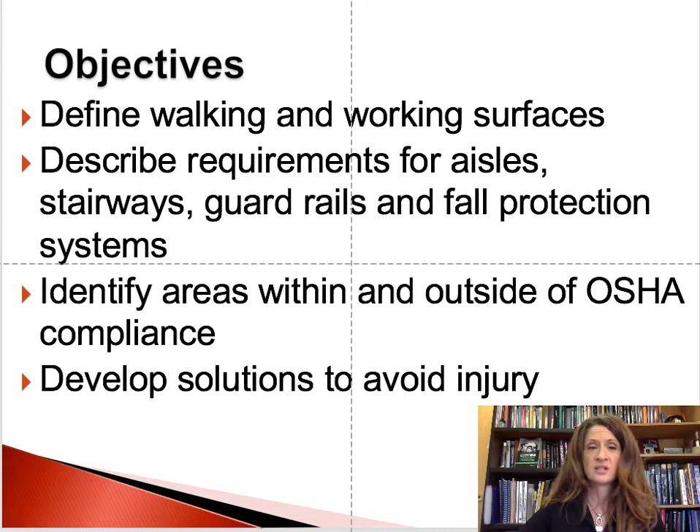Before we begin the learning unit, I'd like to introduce myself to you. My name is Theresa Stack, and I have a Bachelor of Science degree from the University of Connecticut in Natural Resource Management and Engineering, as well as a Master of Science degree from the University of Washington in Occupational and Environmental Health. I'm currently pursuing a doctoral degree from the University of Montana. I am a certified professional ergonomist and a certified safety professional. I recently published a text, Occupational Ergonomics, a Practical Approach, through Wiley.

My professional experience: currently I am an associate professor at Montana Tech of the University of Montana in the Safety, Health, and Industrial Hygiene program. Before that, from 1999 to 2013, I was the senior occupational ergonomist in support of the Department of the Navy. I have also worked for the Idaho National Engineering and Environmental Laboratory in Idaho Falls, Idaho, and was a field technician responsible for cleaning up chemical and oil spills in the environment in Connecticut.

We will cover the different parts of the standard. There are 10 parts of this standard, which include general requirements for all walking and working surfaces, considered a horizontal part of the standard, as well as the vertical part of the standard, which covers specific walking and working surfaces: ladders, step bolts and manhole steps, stairways, dock boards, scaffolding, and rope descent systems.

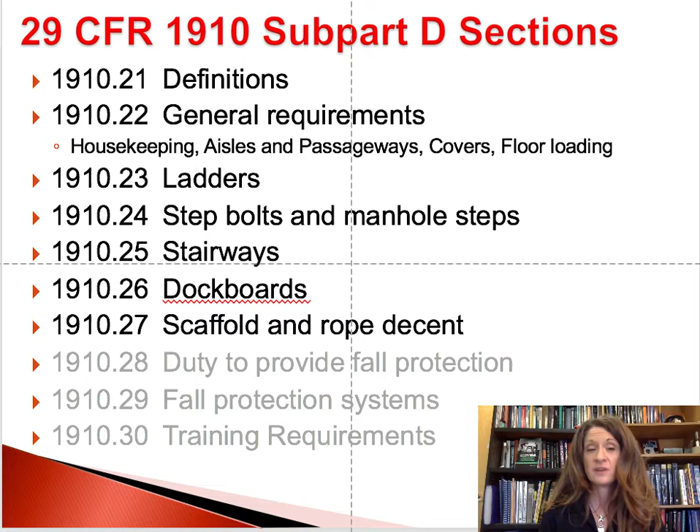In a lesser degree, we'll talk about the requirements for your duty to provide fall protection equipment, fall protection systems, and training requirements for fall protection systems. This is not covered in great detail within this area, and therefore you should seek more information in the standard or a different learning unit, if this is a requirement for you.

So what's the data as related to walking and working surfaces? Why do you believe this will be a concern within your workplace? Well, there were 800 fatalities related to walking and working surfaces in 2015. 16% of them were from slips, trips, and falls, and of those 800, 81% of them were falls to lower levels.

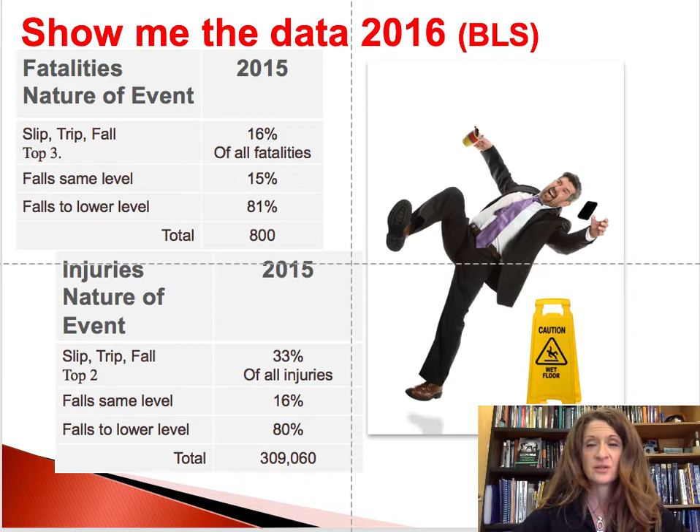As far as injuries go, 33% of all injuries experienced by people in the workplace were related to slips, trips, and falls. It is the number 2 way in which people get hurt in the workplace. And again, 80% of those injuries were related to falls to lower levels.

So why do people fall? Well, people fall for many reasons, but the scientific background behind why people fall is when their center of gravity moves outside of their stance envelope. So when your CG is either too far forward or too far back, you fall.

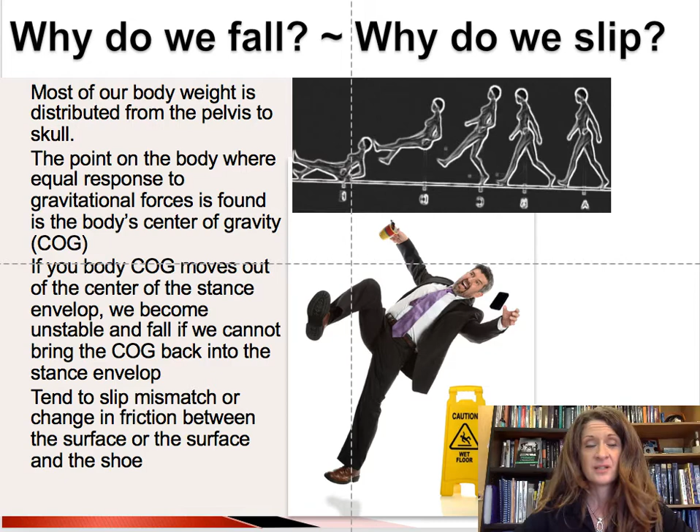You slip typically because of a mismatch between your shoe and the flooring surface, or when you switch from a high to a low coefficient of friction. So going from a rug to a wet floor would be a reason why people would slip, or the reason why people trip is going from a low coefficient of friction, like a wet floor, onto a high coefficient of friction, like a carpeted area. Also, wet surfaces tend to be slippery, and people trip over things that protrude out into the walkway. So we fall because our center of gravity is not within our stance. We slip and trip because of changes in the coefficient of friction.

So the scope of 1910 subpart D covers general industry. This is all places in which people walk or work. If you're part of a construction site, that would be 1926, so the requirements are not here, as well as maritime is covered under a different occupational safety and health standard. So all other areas, factories, office buildings, hospital environments, schools, they're covered under general industry.

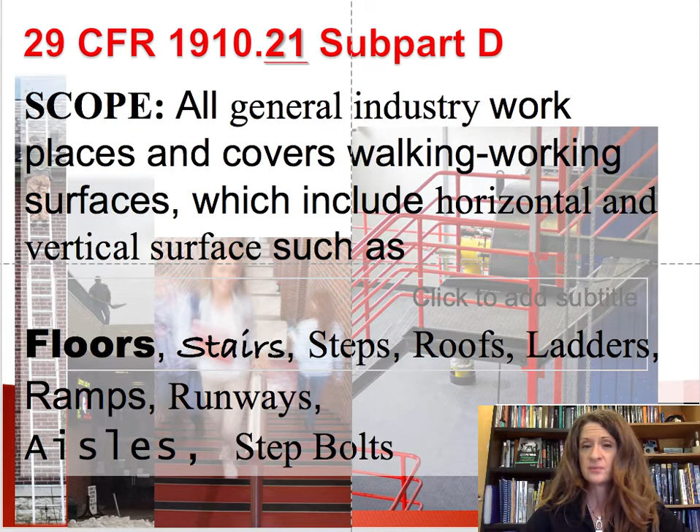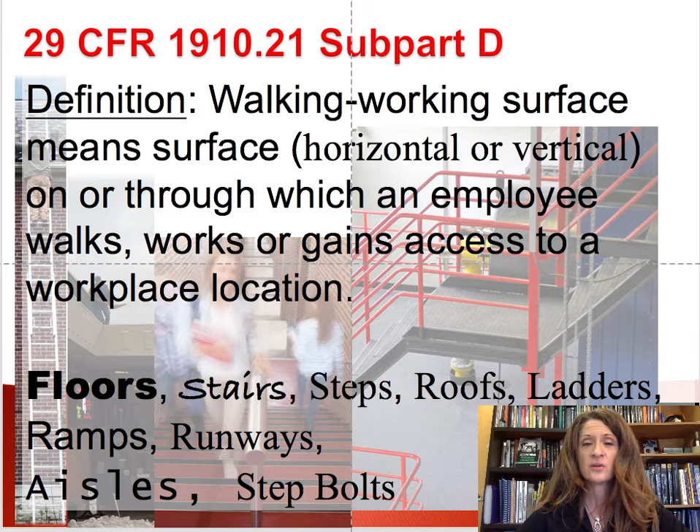And this particular subpart D covers workplaces where walking and working surfaces are both horizontal and vertical, such as stairways, steps, roofs, ladders, ramps, runways, aisleways, or step bolts. Walking and working surface means a horizontal or a vertical surface on or through which an employee walks, works, or gains access to a working location.

Another definition that is important is an unprotected side or edge. That's a walking and working surface where there is no wall, guardrail, stair rail, or other type of system in place to protect an employee from falling to a lower level. This picture is an example where there is no guardrail or balcony in place to protect an employee from falling to a lower level. That's the definition of an unprotected edge.

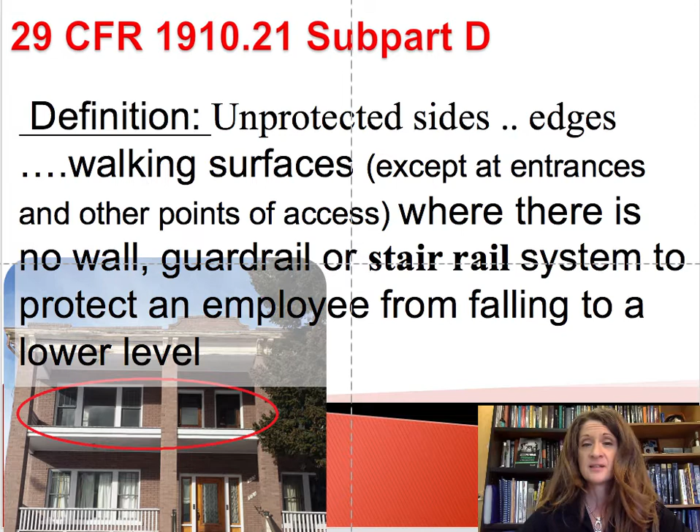Now that we've finished our definitions, let's get into the specific general requirements which cover all places of employment in which walking and working surfaces are found. All places of employment, passageways, storerooms, should be kept clean, orderly, and in a sanitary condition.

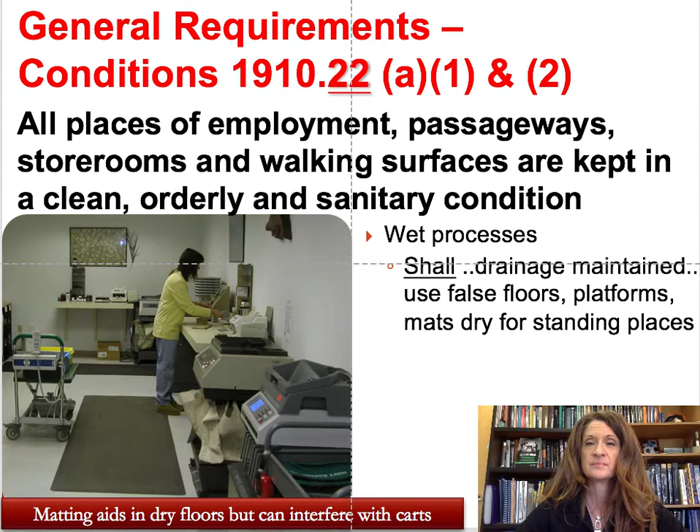A new rule under subpart D, that's 1910.22, states that walking and working surfaces are maintained free of hazards such as sharp protrusions, objects, loose floorboards, nails, splinters, and loose tiles, so that people don't trip.

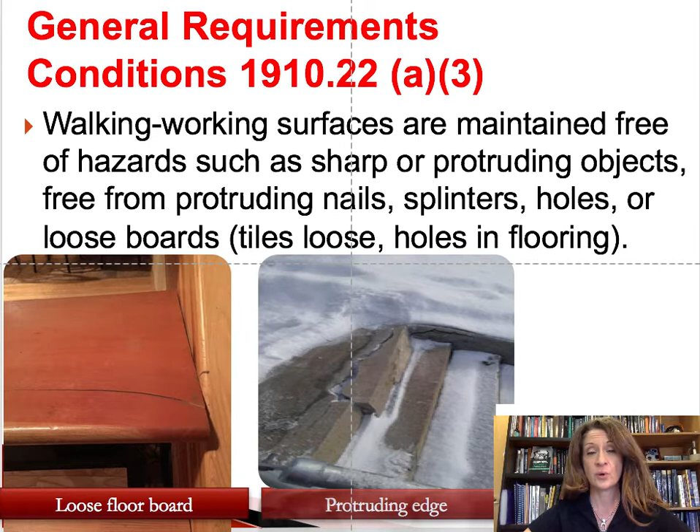So are these proper walking and working conditions? Well, at our loading dock here, you can see that people cannot actually climb up the stairs to the loading dock. Folks were actually jumping off of the loading dock. The stairs aren't clean and they're also blocked.

In this picture, we have a box in the way that prevents you from being able to exit. This would not only be a violation of subpart D, walking and working surfaces, but also a violation of subpart E, means of egress.

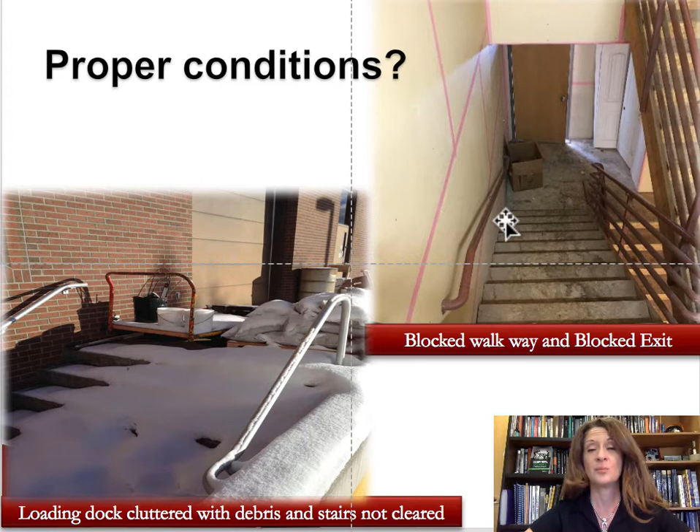General requirements also require employers to inspect walking and working surfaces regularly and correct, repair, or guard against hazardous conditions. This is another addition to subpart D that may be new to you if you're following the old standard. You can see in our picture here where the ladder extends into the walkway.

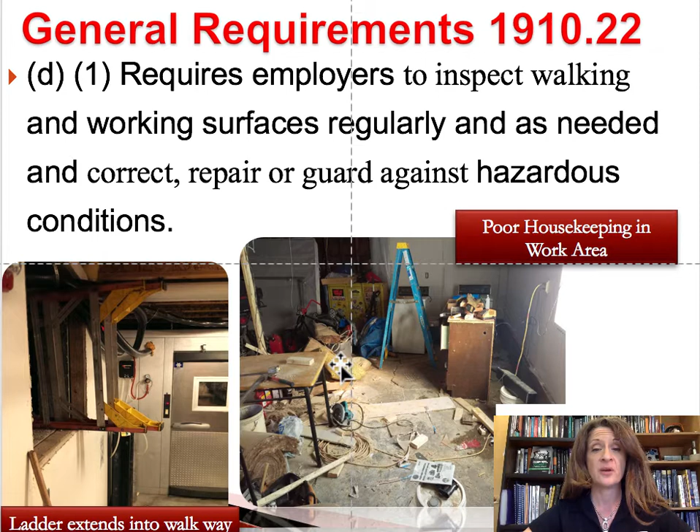People may walk into it when they're going to the cooler. And in our construction zone, although this would be repair within a facility and so would not fall under the construction standard but under general industry, we have a housekeeping issue here, and certainly our tripping hazards are not acceptable.

So we've covered the general requirements for walking and working surfaces, and now we'll get into general requirements for ladders.

Ladder rungs need to be not less than 10 inches and not more than 14 inches apart; that is the step distance. Step ladders, such as pictured here, should be no higher than 20 feet, and a step ladder like this needs to have a locking device in place when it's in the expanded position. The minimum width for the ladder is 11.5 inches, while the minimum width for a step stool is 10.5 inches.

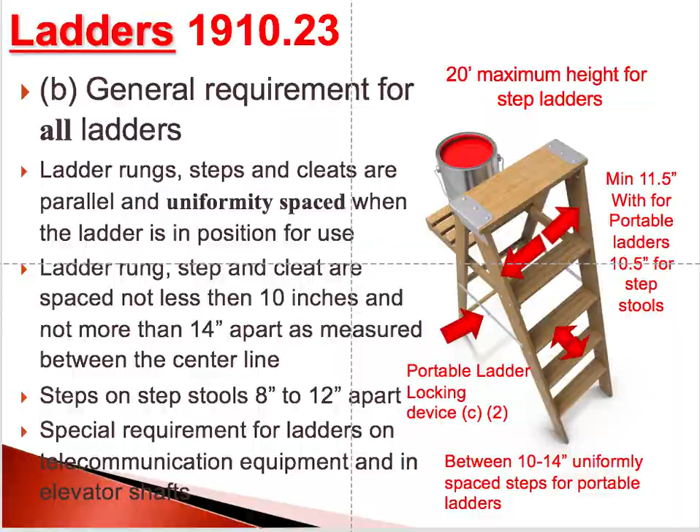Ladders are not to be loaded beyond their maximum intended load, and this includes the weight of the person getting on the ladder as well as the tools and equipment carried upon it. That is the maximum load, and the ladder should not be loaded over it. For example, if the ladder's rated weight was 250 pounds and you had a 250-pound worker, you were probably overloading it, because that worker could also be carrying a piece of equipment going up the ladder, or wearing heavy clothing in inclement weather.

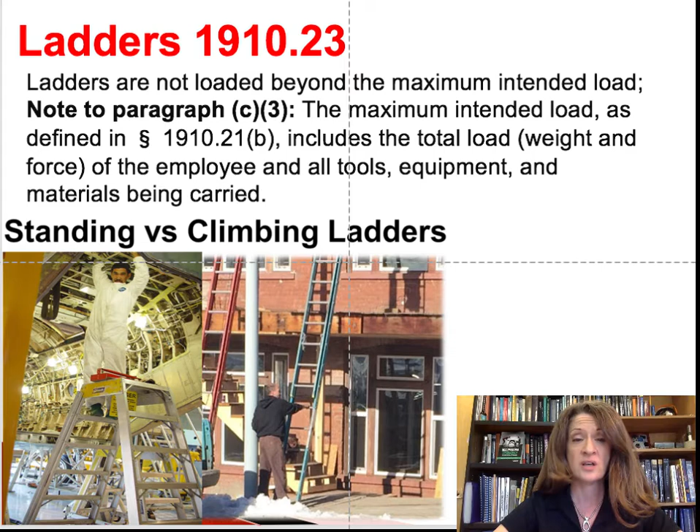There are two different types of ladders: standing ladders and climbing ladders. Standing ladders tend to have flat rungs so that your foot can rest on them comfortably without becoming fatigued when standing for long periods. A climbing ladder, on the other hand, has round rungs so it's comfortable for your hands to grasp while climbing.

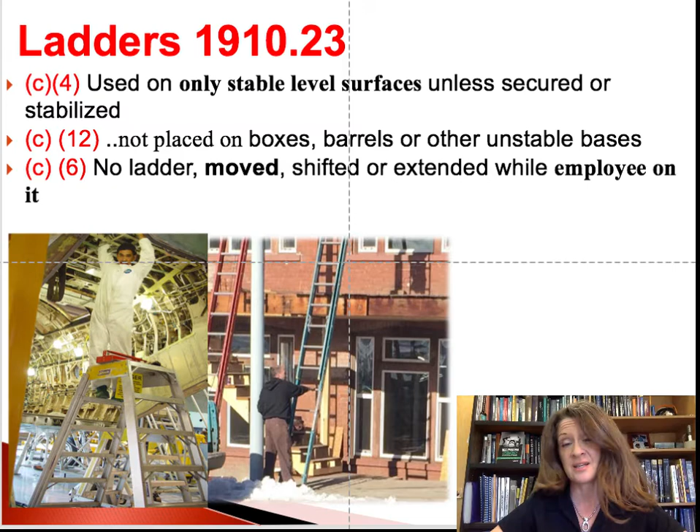Ladders should only be used on stable surfaces unless they're secured or have special stabilizing legs on the bottom. They should not be placed on boxes, barrels, cement blocks, cinder blocks, or other unstable bases. No ladder should be moved, shifted, or extended up or down while people are on it. Ladders are only to be used for the purpose for which they were designed.

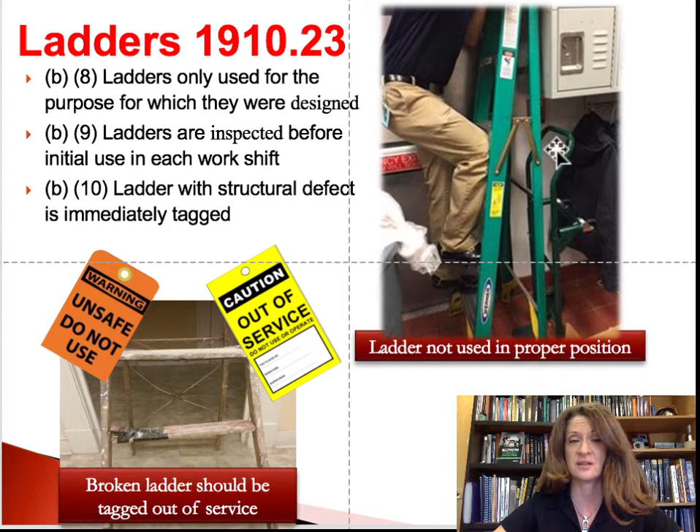This is an example of improper use of a ladder because the spreader bar, which keeps it in place, is not completely engaged. Ladders need to be inspected before every use to ensure structural integrity, and if there is a broken part, you should tag it and take it out of service immediately until it's repaired, if it can be repaired at all.

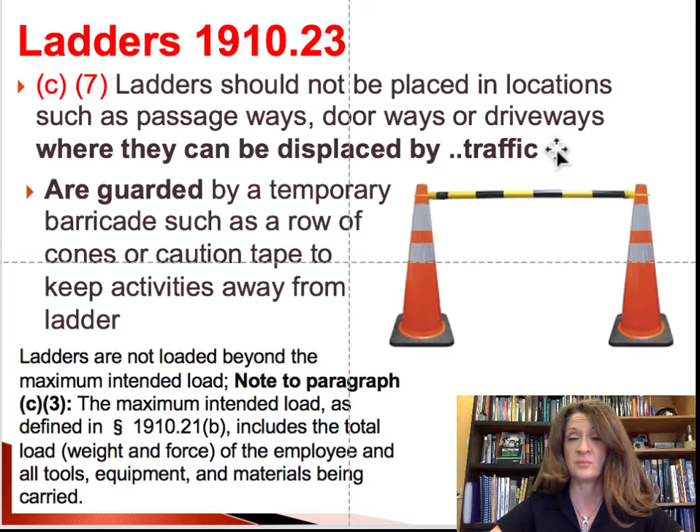Ladders should not be placed in locations such as passageways or doorways where they can be displaced or knocked over by traffic, whether that's a fork truck or vehicle traffic, or someone opening a door. If you need to place a ladder there for repair purposes, such as fixing something in front of a door, you should guard the area with some type of temporary barrier, like you see here, as a reminder for people not to walk into that area.

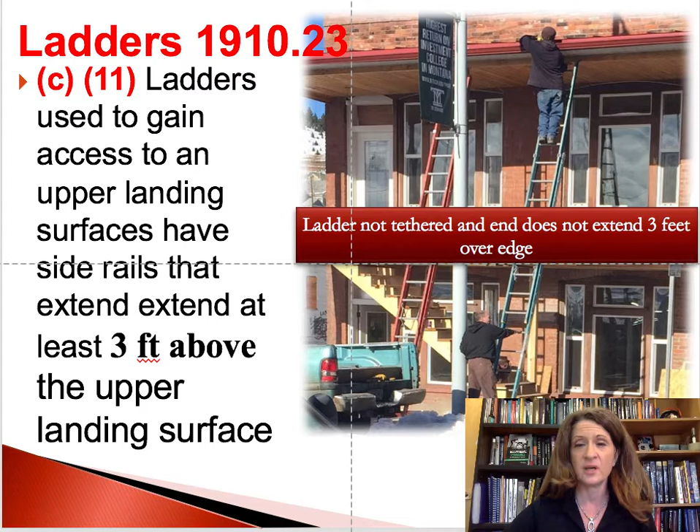Ladders, such as this extension ladder, that are used to gain access to an upper surface, such as a roof edge, need to have the side rails extending at least 3 feet above the upper surface. This is an example of where the ladder is not extending above the upper surface, and it can absolutely slip out from underneath the individual who is on it, even though somebody's trying to support it from the surface below. This is a really dangerous situation to be in.

Is this proper use of ladders? No.

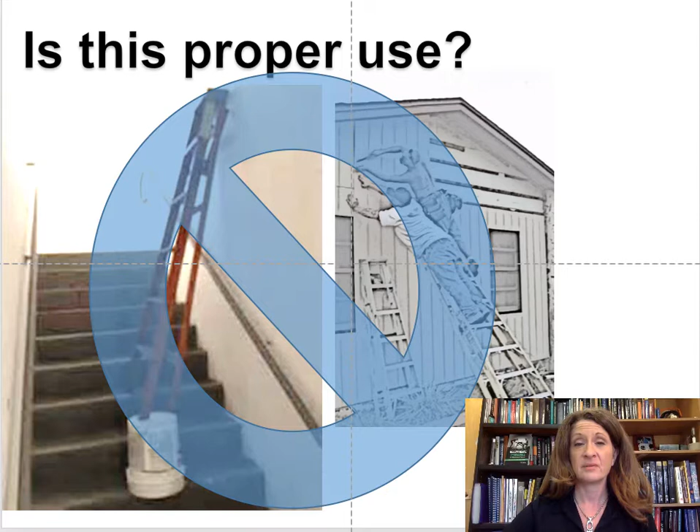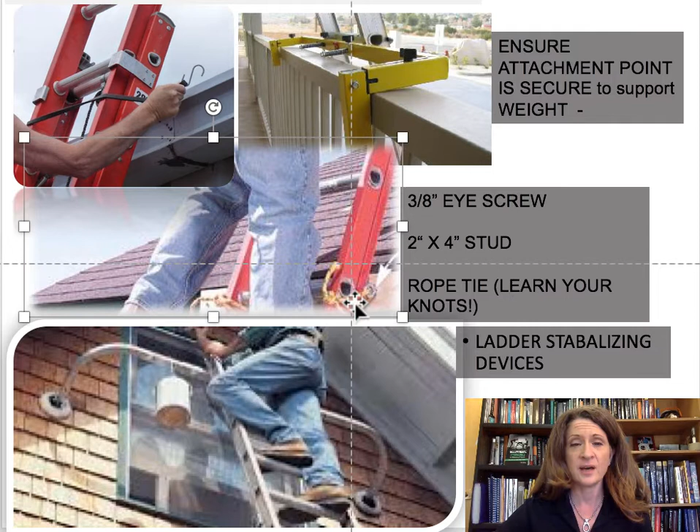Here is an example of where a worker had put a 2x4 down in place and put a 3/8 eye screw into the 2x4 and then tied a rope to the eye bolt in the ladder. So this would be an example of where the ladder was secured well to the roof edge, and you can see it is extending above the roof edge surface.

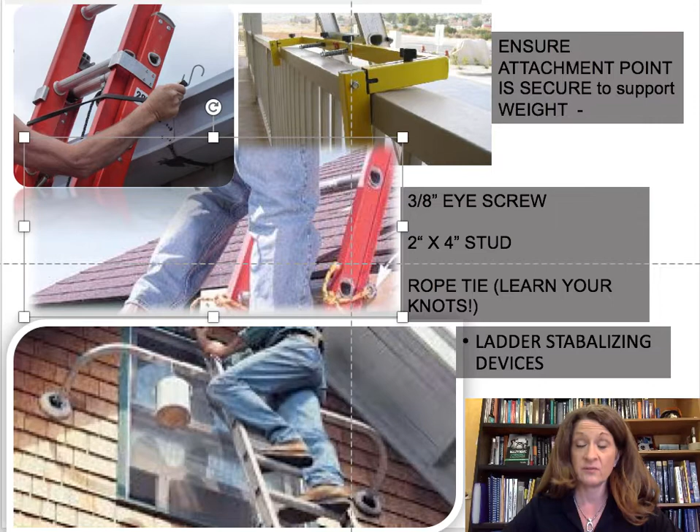And this is an example of a spreader bar or a stabilizing device that can be used when you're working high up in the air, and it helps the ladder from moving side to side, and it also enables this person to get close to the windows in which they're working. So there are lots of different kinds of devices that can be used to stabilize a ladder once people get above 4 feet in the air.

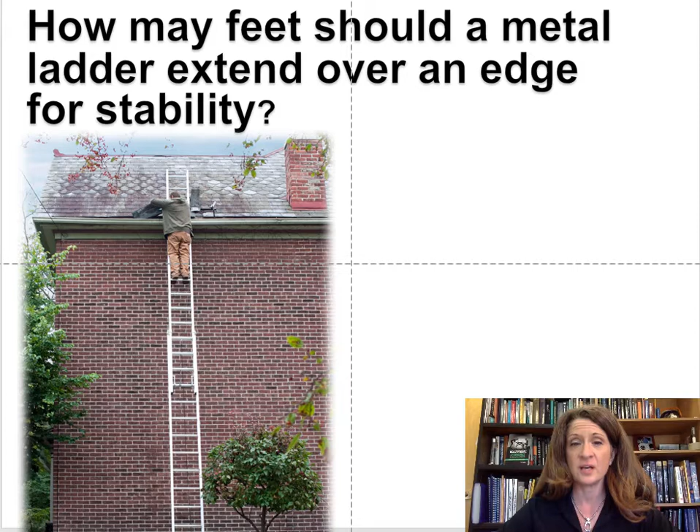So as a review question, how many feet should a metal ladder extend over an edge for stability? And the answer is 3 feet.

We've moved from portable ladders to fixed ladders. Fixed ladders need to be able to support the maximum weight in which it is intended to support. So again, that's the weight of the person plus the tools and equipment for which they would be using when they were climbing the ladder.

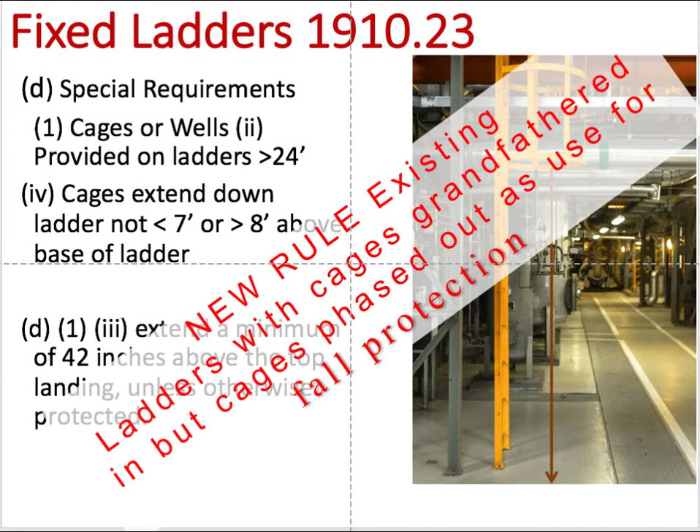And that's because a cage such as this does very little to stop someone from falling. They do fall into the cage, but they're likely to fall through the cage or be very severely injured when they are falling.

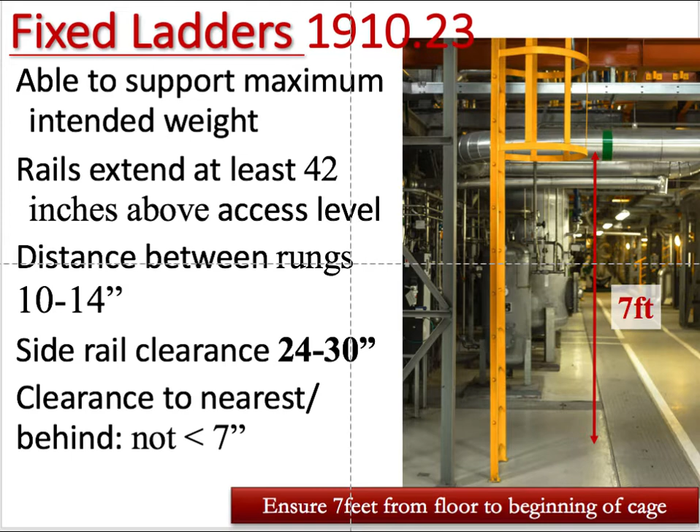The new requirement as of November 2018 is that all fixed ladders installed after November 2018 that are greater than 24 feet in height need to have a ladder safety system in place, and this ladder safety system will be required on all ladders, even ladders that were installed in 1988, by 2036. So you have to retrofit your existing ladders, or for all new ladders above 24 feet -- that's the top of the ladder to the ground -- must have a ladder safety system in place.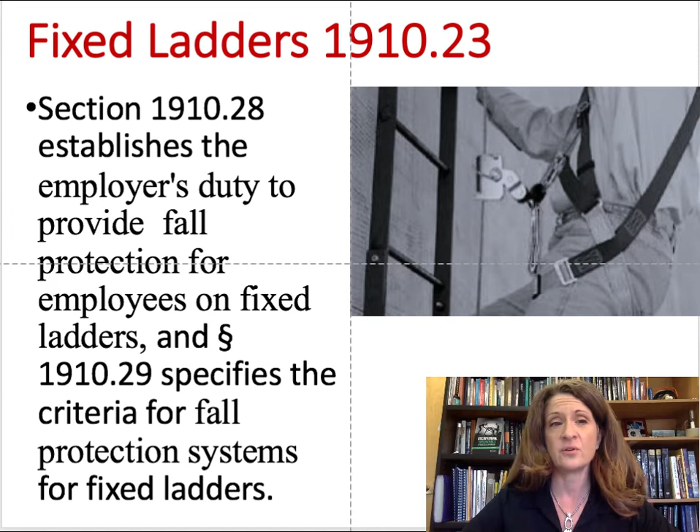You can leave them in place, but you'll have to provide a ladder safety system after 2036 or for all new installations after November of 2018.

So we've gone from portable ladders to fixed ladders, and now step bolts, which are pictured here, or manhole steps. Manhole steps are uniformly spaced between 12 and 18 inches apart. That's this distance here. They need to be 4.5 inches or greater in width, and the clearance behind is a 7-inch clearance. So if they were installed before January of 2017, the standard states that they're capable of supporting the maximum intended load, which is again the worker and any equipment they would be carrying.

Anything installed after January of 2017 needs to support 4 times the maximum intended load, as well as any new installations after January of 2017 need to be coated or constructed so that if they're in a corrosive environment, such as concrete that can break down over a period of time, the material needs to be coated to prevent corrosion.

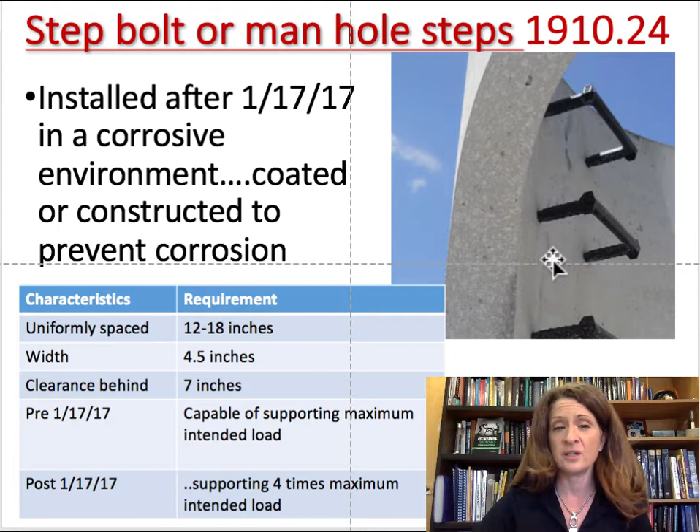So we've moved from ladders to stairways. 1910.25, you need to have at least 6 feet 8 inches between the leading edge of the tread and an overhead clearance. That's so people don't bump their head when they're walking up the stairs. They shouldn't have to duck. As in this picture, there is not at least 80 inches of clearance.

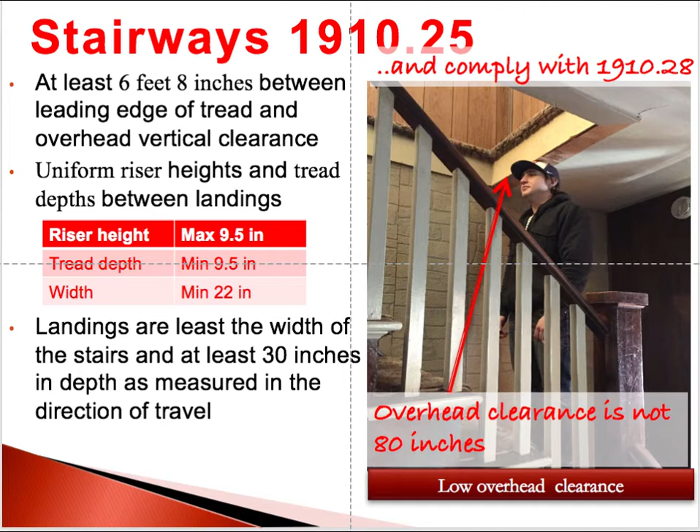The riser height, so that's how high you lift your foot when you walk from one step to the next. The maximum height is 9.5 inches. The minimum depth, so that's how deep the stair is, is 9.5 inches, and the minimum width is 22 inches. And you need to have at least 30 inches of depth on every landing, so you have enough for people to step up and stop and possibly turn a corner.

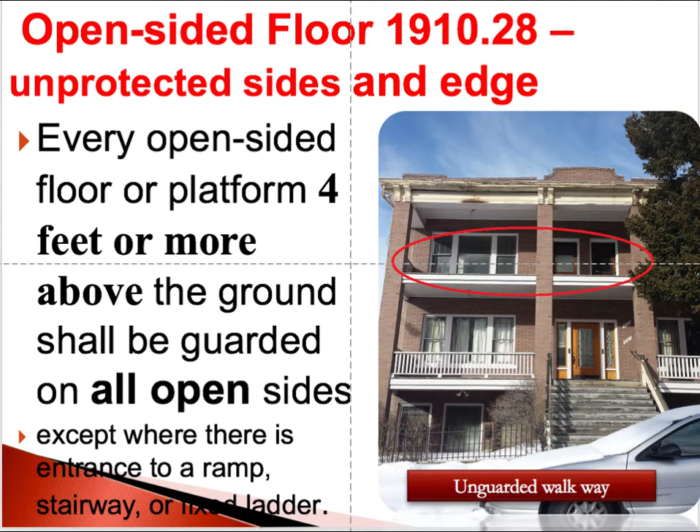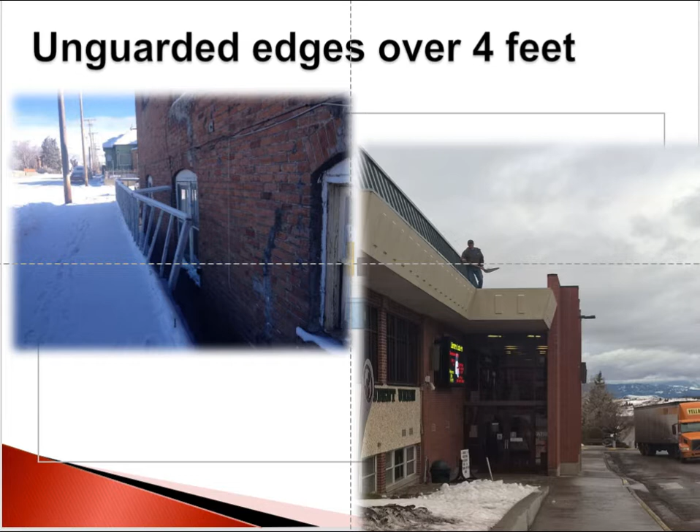And so although the next slide covers open-sided edges, I want you to understand that a stairway can also be an open-sided edge if it doesn't have a stair rail or a handrail, and needs to be guarded anytime it is more than 4 feet above the ground. So are these examples of unguarded edges that are more than 4 feet above the ground? Certainly, this roof is an example of an unguarded edge, as well as the distance in which you'd fall because the guardrail is not secured appropriately in place.

Surfaces over 4 feet high, whether it's a platform or a stairway, need to be guarded, or anytime you have 3 stairs or 3 treads, that also needs to be guarded. So it's either 4 feet, you need to guard it with a hand or guardrail, or if you have 3 steps or more, it needs to be guarded.

And so the requirements for this are the top rail is 42 inches above the surface, and that's plus or minus 3 inches, so it's 39 to 45 inches. Your mid-rail is at 21 inches, ensuring that there's no more than 19 inches of opening between either the ground and the mid-rail or the mid-rail and the top rail, and for a static load, which means somebody leaning into the top rail, that top rail needs to be able to withstand at least 200 pounds of force.

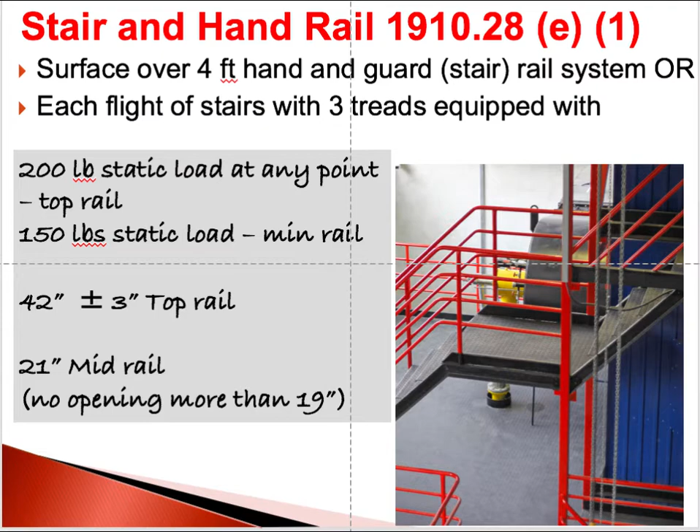To explain a little bit about the guardrail, handrail standard, a stair rail is on the open side of a stair, where a handrail is on the closed side of a stair. And the standard says that this rail needs to be 42 inches high, again, plus or minus 3 inches. And that's because 99% of the population is shorter than 6 foot, 6 inches tall, and therefore their center of gravity will be below this top rail, and they're not likely to accidentally topple over the rail. So that's where the specific anthropometric measurements come into place when dealing with stair rails and handrails.

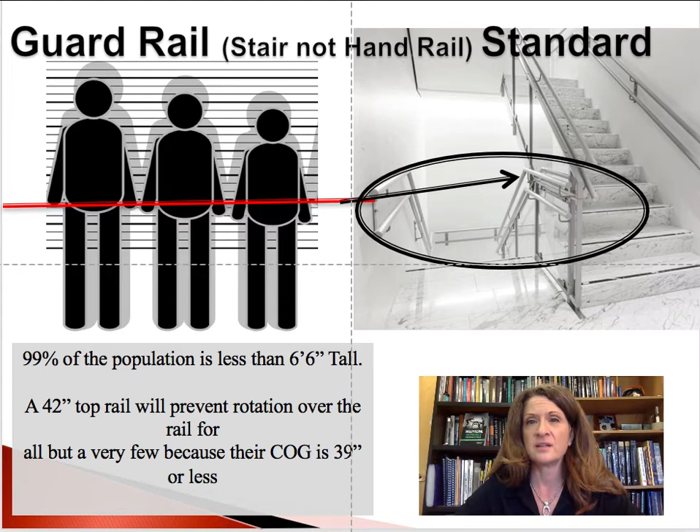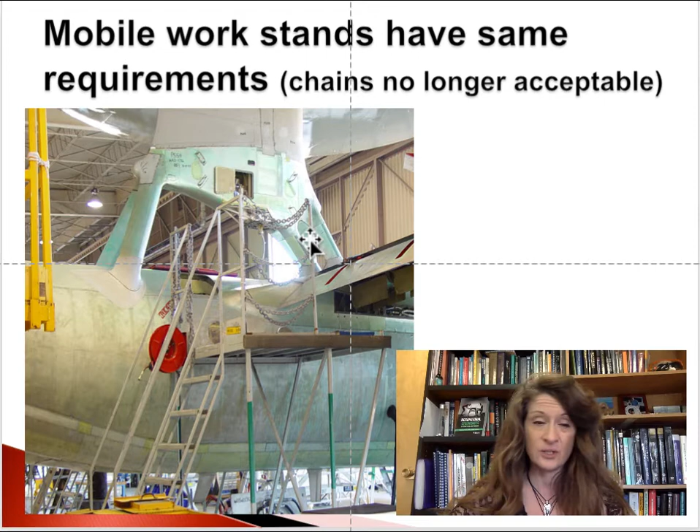I wanted to give a definition of what a hole means: a gap or open space in the floor or horizontal work surface that is at least 2 inches in diameter. This is an example of a hole—it's bigger than 2 inches in diameter, a situation where somebody can fall through to a lower level.

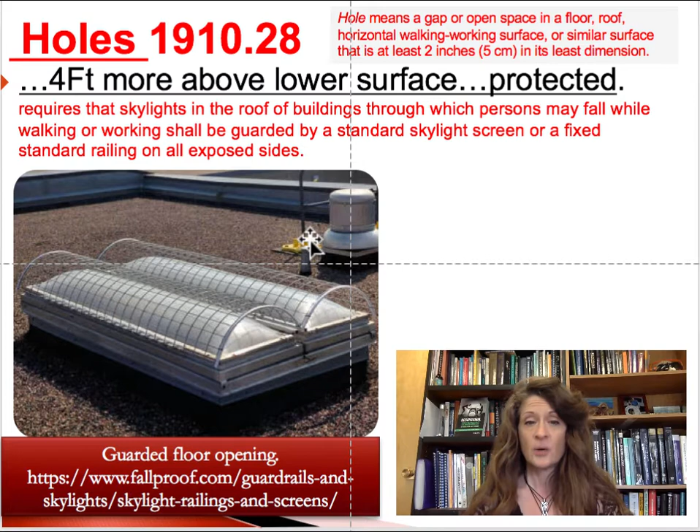Skylights need to be protected, either temporarily with barriers while people are up there, or permanently, as you see here, with a cage system on top of the skylight.

Moving forward from stairways to dock boards. Dock boards are used to bridge the gap between the loading dock and the truck. They can be dangerous because they're heavy, and if they're not put in place appropriately, the person or the industrial truck going onto the dock board can fall off, or the dock board itself can fall off.

They need to be anchored in place somehow to prevent movement, which is why this one has a safety pin on it. Vehicles on dock boards should secure their wheels with wheel chocks so they don't move and kick the dock board out of place. Dock boards should also be equipped with handles to permit safe handling so you don't get your fingers caught underneath them.

The new standard that came into play in 2017 requires that dock boards have an edge on them to prevent a vehicle from rolling off.

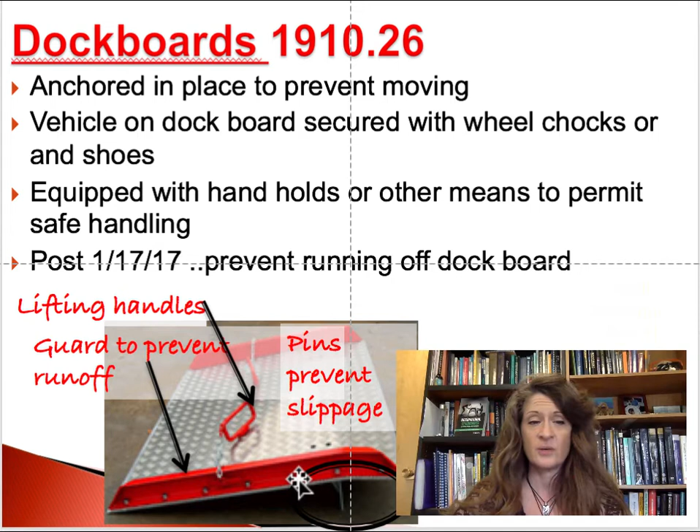Scaffolding used to be in the old part of 29 CFR 1910 subpart D, but it has now been removed. If you need to reference scaffolding, you need to go to 29 CFR 1926, which is the construction standard. So all of scaffolding has been moved from walking and working surfaces to the construction standard.

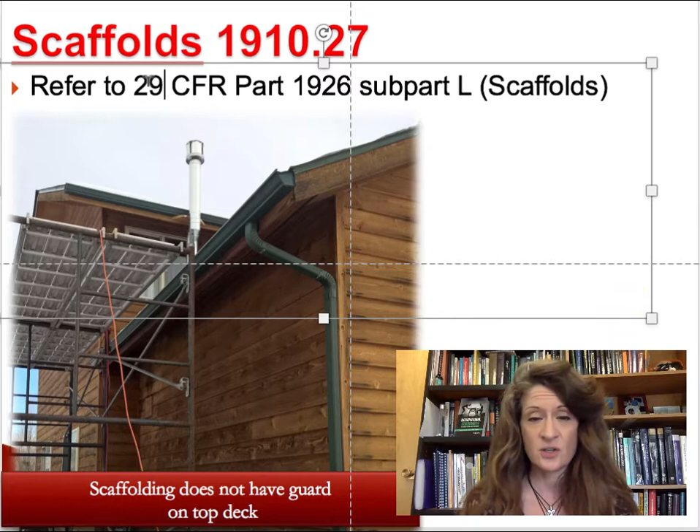This is an example of scaffolding which doesn't have the top rail on it—an example of scaffolding not being used appropriately, or more accurately, not set up appropriately.

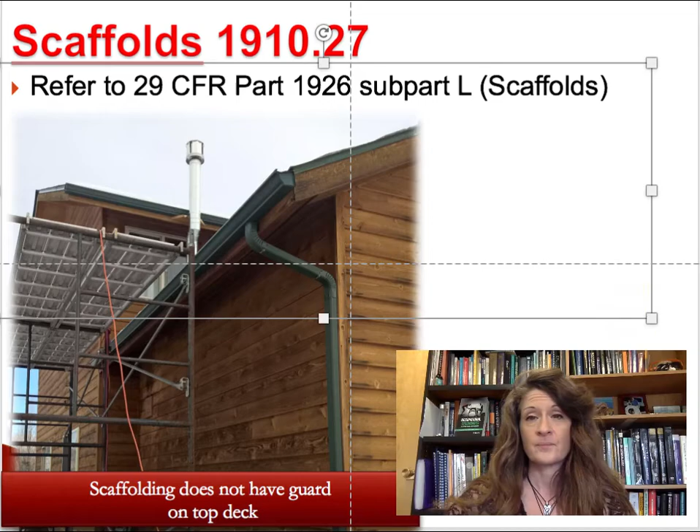Rope descent systems are used when people are working on surfaces where you can't use a ladder or scaffolding. For example, if you have a tall building, 4 or 5 stories, and people need to wash windows, as you see in this picture, that's considered a rope descent system.

Before use, the building owner must, in writing, test, certify, and maintain each anchorage point so that it is capable of supporting at least 5,000 pounds. This is a change to the standard—you now need an annual inspection and a 10-year certification by a secondary entity to ensure that the anchorage point hasn't worn out over time.

People can only use rope descent systems under the direction of a qualified person, and training for people using rope descent systems is part of 1910.30. It's subpart D, part of this standard, but it's later on in the standard that discusses the required training.

Also, for rope descent systems, you have to have some kind of anchorage point, usually anchored to the person or to what they're descending on. Rope descent systems shouldn't be used in hazardous conditions such as high wind. And if you have a sharp edge over which the rope would pass from your building, you need to pad the edge so the rope doesn't rub, and make sure there are no hazardous chemicals, open flame, or other conditions that could be destructive to the rope itself.

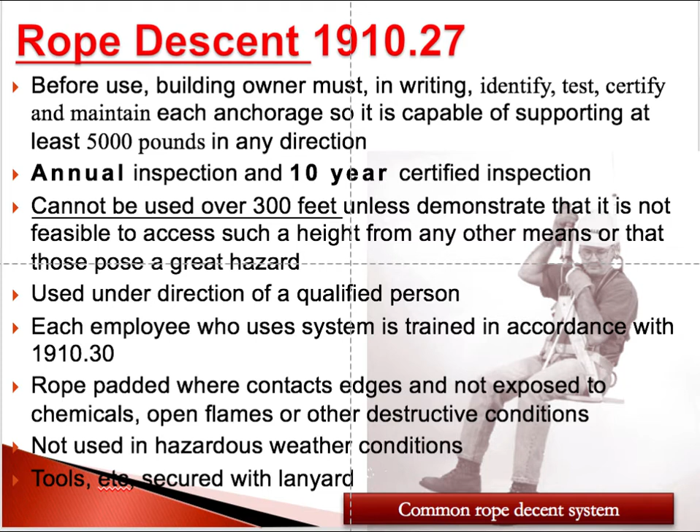For our knowledge check: can you list 3 requirements to consider with the use of either a dock board or a rope descent system?

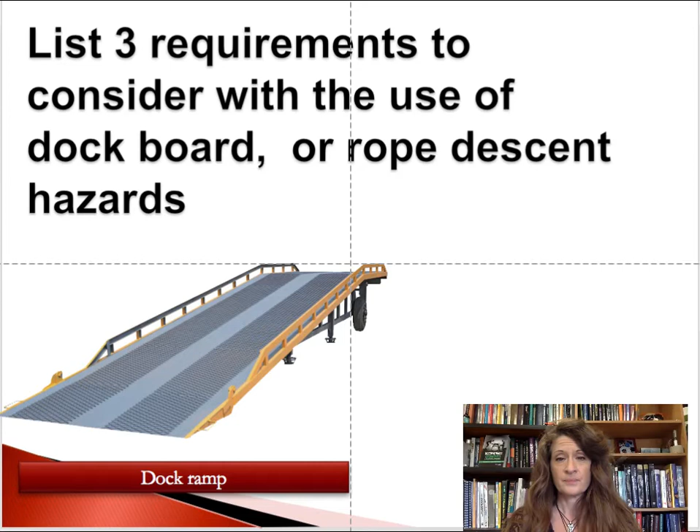Some possible answers for dock boards: they should have a guarded edge, carrying handles, pins to secure them in place, and vehicles need to chock their wheels when on a dock board. For a rope descent system, they can't be used for distances greater than 300 feet, require annual inspection, need a 5,000-pound anchorage point, and must be certified every 10 years.

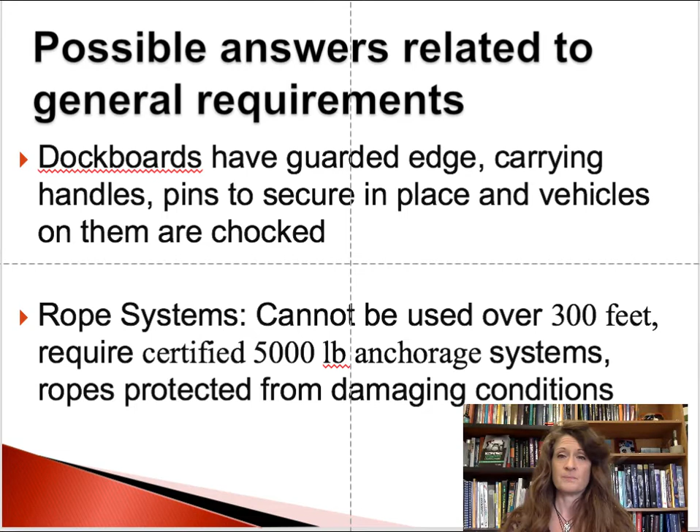1910.28 isn't covered in great detail here, but I wanted to give you a brief overview because you do have a duty as an employer to have fall protection and falling object protection in place for people. Employers need to protect workers from falls by choosing from a wide range of fall protection systems, including personal fall protection systems, and eliminating the mandate to use guardrails as the primary method. This standard gives you flexibility to determine which work method will work best for you.

In areas that are temporary or infrequent, you can use designated areas as a means of protecting people from falls. You can also use guardrails, safety nets, or other fall protection equipment that best meets the need. If you have a roof that people need to access for repair services, make sure your roof has protections in place, and reference this part of the standard.

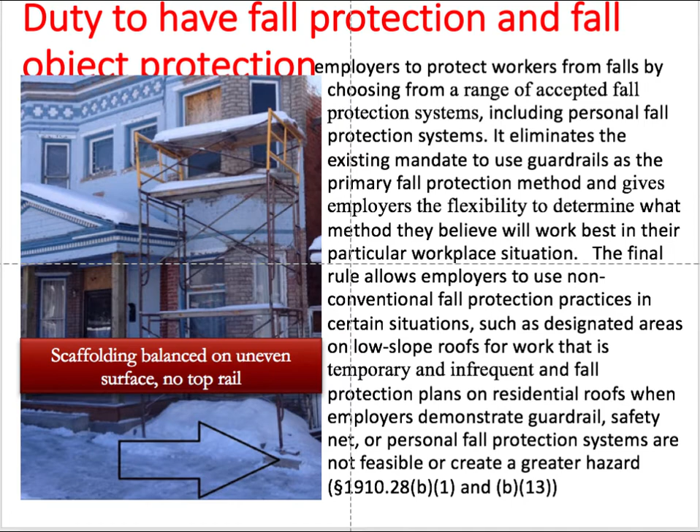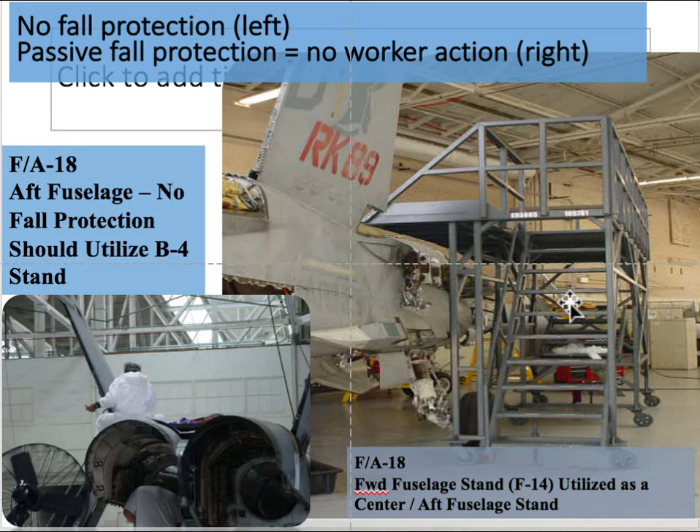Some other examples of what we call passive fall protection. Passive fall protection can be the best option in some instances because it requires no worker action or additional worker training. You don't have to have personal protective equipment—you're eliminating the chance for somebody to fall.

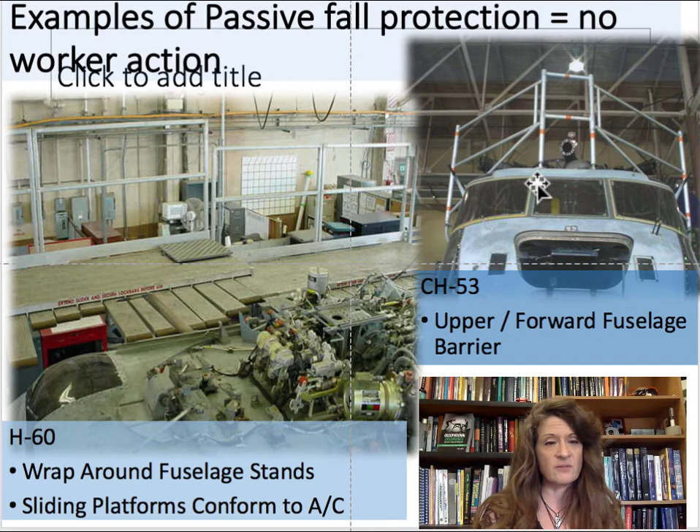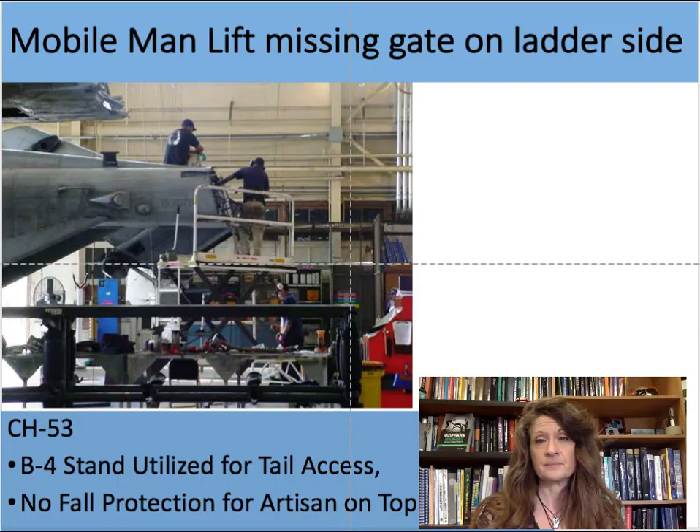Some strategies to avoid injuries: clean up spills immediately or report them, put a cone out so people don't lose traction, use wet floor signs and keep them dry if possible. Another example, when cleaning floors, is to clean one side at a time so people always have a dry surface to walk upon.

You can use non-slip coatings on floors in kitchens and bathing areas if you happen to be in a nursing home. That doesn't actually prevent people from falling, but non-slip coating provides additional traction or friction.

The right shoes for the job—sturdy shoes—can be a policy in your workplace, as well as encouraging people to use handrails on stairs. Never use corridors or aisleways for secondary storage so there's nothing for people to trip over. Keep electrical cords out of the walkway and off to the side if you need to use them. Quickly repair or maintain damaged floor, carpeting, or material. Clean snow out of the way and use well-lit areas—these are all good strategies to prevent injuries in the workplace.

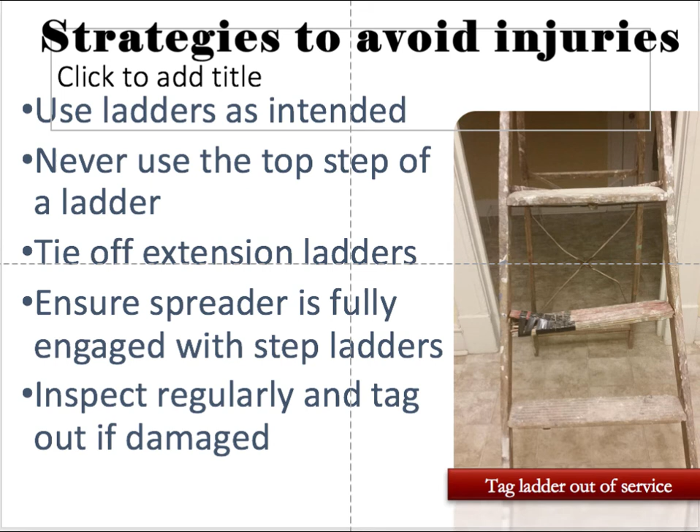Always use your ladder as it was intended—was it an extension ladder or a step ladder? Tie off ladders that have long runs; if they're 60 feet high, tie that off so it doesn't slip out of place. Inspect them regularly and tag them out if damaged. And when using a step ladder with an A-frame, ensure the spreader bar is completely stretched out.

So I have some review questions here. Let's see if you can fill in the blanks regarding the importance of employee awareness and how to take the appropriate actions.

So our answers are: we'd like to keep all work areas clean and dry, aisles and passageways clear, keep exits free from clutter, spills need to be cleaned up immediately, and use signs or elevated mats in wet areas.

Employee involvement is also important, as part of ongoing training and reminders to alert people of the hazards found within your facility, and to have some method in place so they can report them or take action themselves. And of course, be a good role model—don't take shortcuts, clean up spills as they occur, and wear appropriate footwear given the weather conditions.